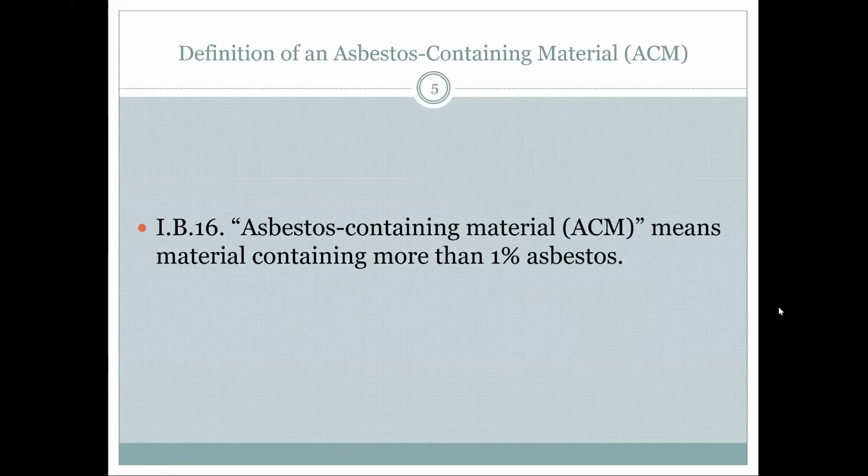All right, the definition of asbestos-containing materials are materials that are greater than 1% asbestos. This is directly out of the reg. It's our definition of when you have to have an inspection.

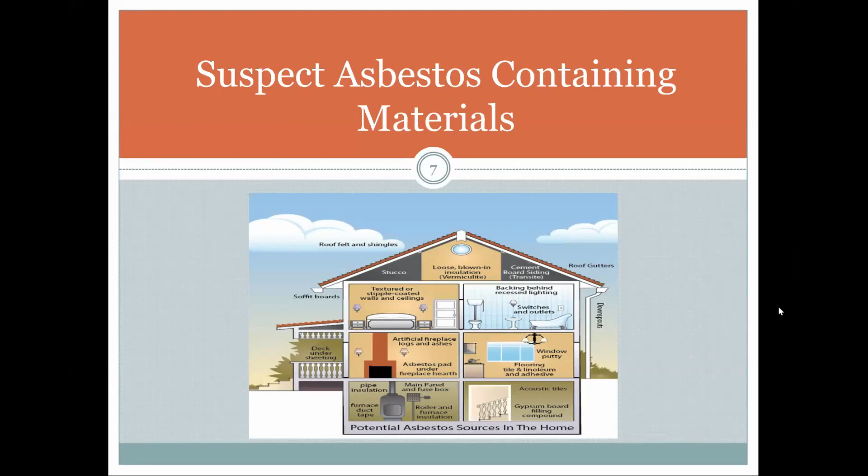So you have, prior to renovation or demolition, disturbing greater than the trigger levels of asbestos-containing materials or suspect asbestos. Some of the suspect-containing materials within residential or commercial buildings can be floor tiles, mastics, roofing felts, roofing mastics. You have TSI, thermal system insulation. I mean, almost everything is suspect asbestos-containing. So just be aware of that.

It doesn't matter really when the building was built. Asbestos has never been fully banned in the United States. The newer the build, probably the less likely you'll have asbestos, but it's still a potential, so be aware of that. Really, there's only a handful of materials that are not suspect materials - that could be metal, wood, glass. However, when you talk about metal and wood, there could be metal products that have asbestos-containing material pressed in between the metal sheets, or pressed wood that also can be comprised of asbestos. So just be fully aware of that. There's so much asbestos out there, it's crazy.

All right, if you do not know if the materials are asbestos, you must assume that they're asbestos-containing, or you have to have an inspection to prove that they're non-detect. We talked about how you have to be greater than 1% asbestos to be called asbestos-containing material. There's another guideline - you also have to exceed the trigger levels of suspect asbestos-containing materials to be regulated by CDPHE.

Those trigger levels are broken down into two different types of structures. We have the single-family residential dwelling, and then we have our public and commercial structure. So on single family, we have 50 linear feet, 32 square feet, or the volume equivalent of a 55-gallon drum. The volume equivalent is usually used for materials that are off substrate that have already been impacted, and you cannot measure them, so pretty small. 32 square feet is a typical sheet of drywall.

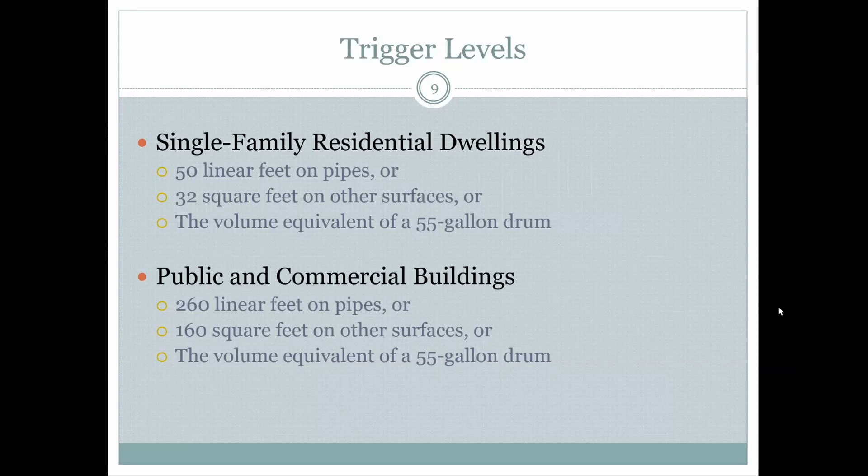So if you're going to be exceeding greater than that in a residential dwelling, then you are required to have an asbestos inspection. Then during renovation or demolition on a public and commercial structure, you have to exceed 260 linear, 160 square, or the volume equivalent of a 55-gallon drum.

All right, this is a really beneficial handout. I would recommend, if you haven't grabbed one of those handouts, to grab it. This is one of our newer handouts. It goes through the flow chart on when you have to have an asbestos inspection. You can reach out to the state, but this one is over there on the table, as well as being posted on our website.

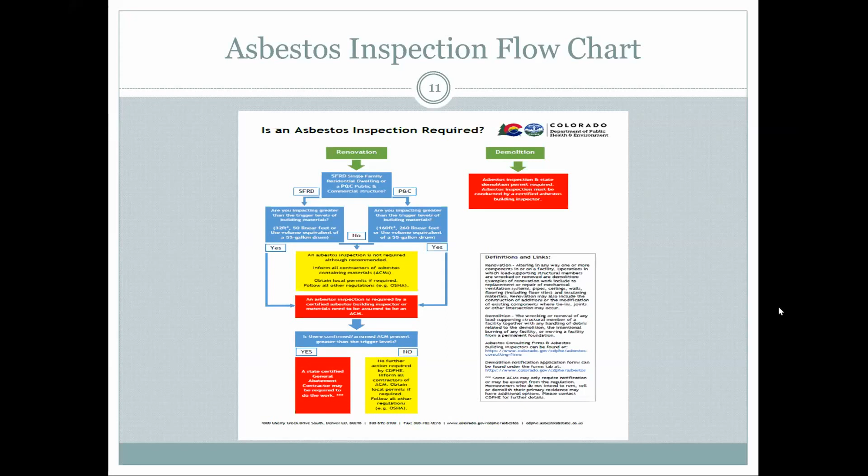All right, so prior to doing remodeling, renovation, or demolition, you want to have an asbestos inspection. We also have a renovation and demolition fact sheet that goes over our trigger levels and has our contact information. It also goes into a little bit more detail if there are exclusions, and you could maybe meet those exclusions. It talks about the trigger levels, and if those will be exceeded.

Buildings of any age, even newer builds, if you guys are tearing out materials, you most likely need to have an asbestos inspection, or you have to have some exempt information from the architect or engineer who. We have this date of October 12th, 1988.

There is no official cutoff date for asbestos, but that is a date that was put into regulation. If the building was built after that date, you could potentially avoid having the asbestos inspection. But just so you all know, I've been at the state for about 8 years now, and I've only seen maybe 2 or 3 individuals who've been able to provide the information necessary to get the exemption from the asbestos inspection. If you are the original builder and your client and your homeowner request that documentation from you, you would be...

...signing a letter stating that to the best of your knowledge, you have not used asbestos-containing materials with the building of the structure. Also, you would want to provide some supplemental documentation. That could be like specs from the information or from the building materials that you have used. You want to keep all that. But we have a form that you all could fill out, or anybody can fill out and send that to us that could potentially exempt you from the inspection requirement.

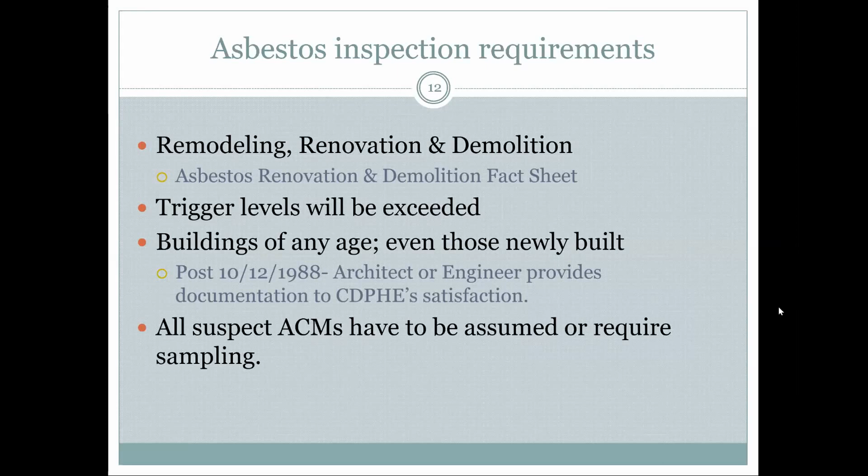Okay, who conducts the asbestos inspection? They're conducted by certified asbestos building inspectors in the state of Colorado. They also are employed by the asbestos consulting firm. So they must work for an asbestos consulting firm that's registered with the state, and they have to be a certified asbestos building inspector. They will conduct the inspection, and then they'll provide the asbestos inspection report.

Again, if all samples are non-detect, then CDPHE does not have any additional requirements. You do have to have that asbestos inspection report on site during all your renovation.

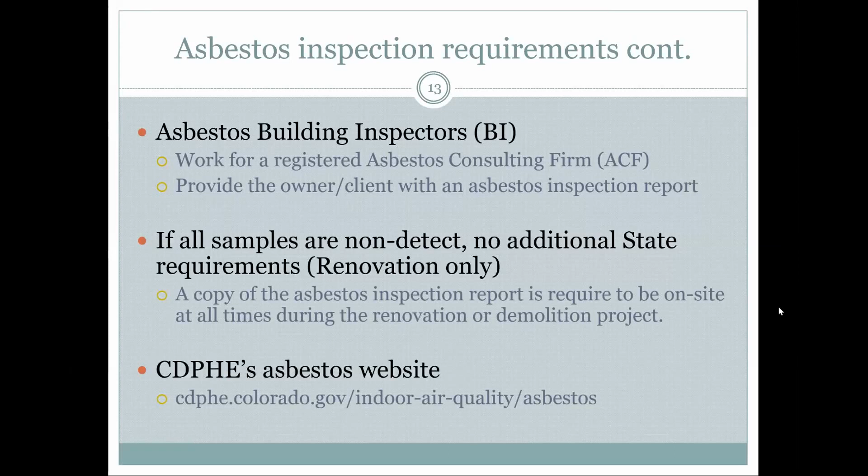Find this information on our website. I'll give you a second if you want to write it down. Otherwise, you can just do a Google search: Colorado Department of Public Health and Environment. Type in the search asbestos. It should bring you to our homepage. It'll give you all of our contact information. You all can reach out whenever you want to.

The inspection reports have to include a couple of pieces of information. It's more than just lab data. Sometimes we get just lab data sent to us, like if a homeowner took their own samples or somebody else took their own samples. We can't disallow individuals from taking their own samples, but those are only used for knowledge, informational purposes. They cannot determine the scope of work. They can't be used for renovation. So you always want to hire that asbestos consulting firm.

It'll include the inspector's name, certification number, a bunch of other things, registration number, their description. Basically, they've been provided what the scope of work is, and they've sampled accordingly. They'll have a physical description of the components to be inspected. They'll include diagrams, locations of the asbestos-containing materials. They'll highlight that information. They'll include assessments of friability, their summary of findings, and the...

So there's a couple of types of inspections. You could have a limited inspection if you're doing like a bathroom remodel. You could have a comprehensive inspection if the structure is going to be a complete scrape and demolished. So limited inspections are isolated to the areas that are going to be impacted during your project. And then comprehensive is top down, inside out, everything that's suspect gets sampled, or it must be assumed.

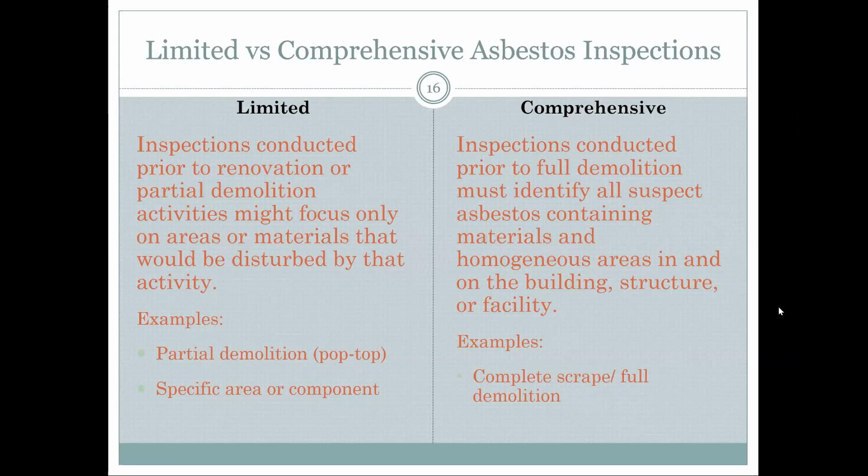Permitting, we're going to go through this pretty quickly. We talked about it a little bit already. We have an asbestos building inspector who works for the asbestos consulting firm. They conduct an inspection and sample accordingly, then provide that inspection report to their client.

If you're not doing demo, you can skip to the following steps at the end. Otherwise, you'll have to hire a general abatement contractor. They're the ones allowed to do asbestos abatement in the state of Colorado. They will submit a permit to the division for review with the payment. Once the application is approved, the general abatement contractor will receive the stamped approved application, and then they conduct the work during those approved dates.

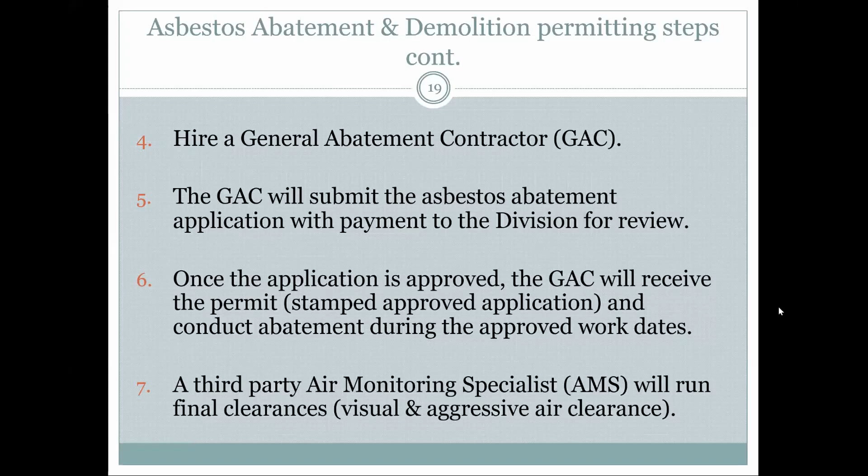If there's a friable asbestos abatement project, then there is a requirement for an air monitoring specialist. They're a third-party consultant who comes in to clear the area so it can be reoccupied.

Demolition notification applications are submitted to the state after that. Again, if you don't have to have a general abatement contractor because you don't have asbestos, you would skip to this step after the inspection. That demolition notification application is submitted to us for review and approval, then issued to the contractor listed on the application. They'll complete the project during the required dates.

I wanted to emphasize the definition of demolition as it's written in Colorado Reg 8 — essentially the removal of load-bearing structural members. So interior renovation that doesn't impact load-bearing structural members would not count as demolition, meaning you would not be required to have a demolition notification. You would just need that asbestos inspection and keep that report on site.

Examples include pop-tops, structural walls, and complete demo. Every single structure coming down has to have its own demolition notification application submitted to the state.

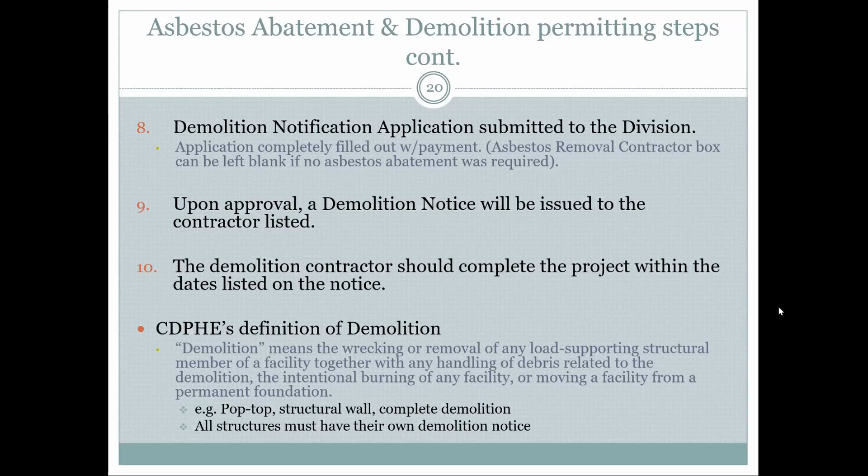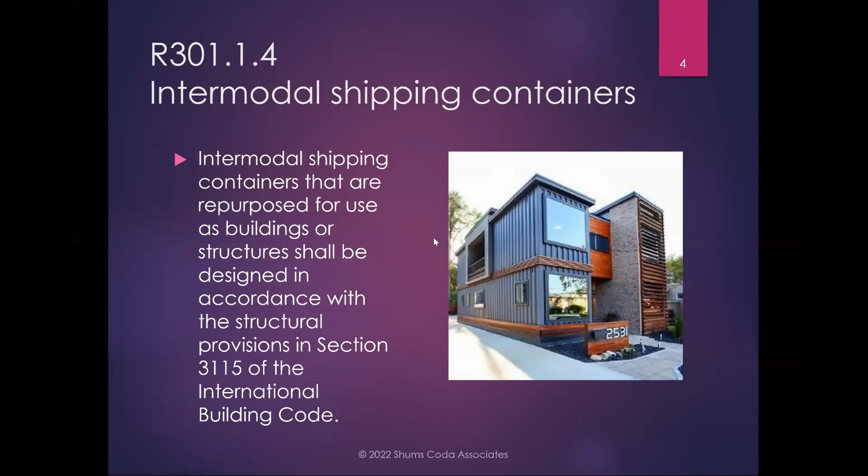First one — I don't know if we'll see this in Cherry Hills. I thought about whether to include it. We now have provisions in both the residential code and the building code for intermodal shipping container buildings. So if you want to build a home out of shipping containers, we now have provisions to do that in the code — it's no longer an alternate design. Most of it is structural, and it should be interesting to see how that works. Some people hate shipping containers, others say that's the way to go. Definitely something we're going to be looking at.

Emergency escape and rescue openings. Just some clarification: of course, we have to have emergency egress windows out of basements, and if you have one or more sleeping rooms, one in each sleeping room, pretty much.

But then it talks about when I get out of that window well, I have to have at least 36 inches of open space, in the yard, to get to the street or the public way. So it's probably not going to be an issue with our setbacks in Cherry Hills, but if you're building in other jurisdictions with tighter setbacks, that could be an issue.

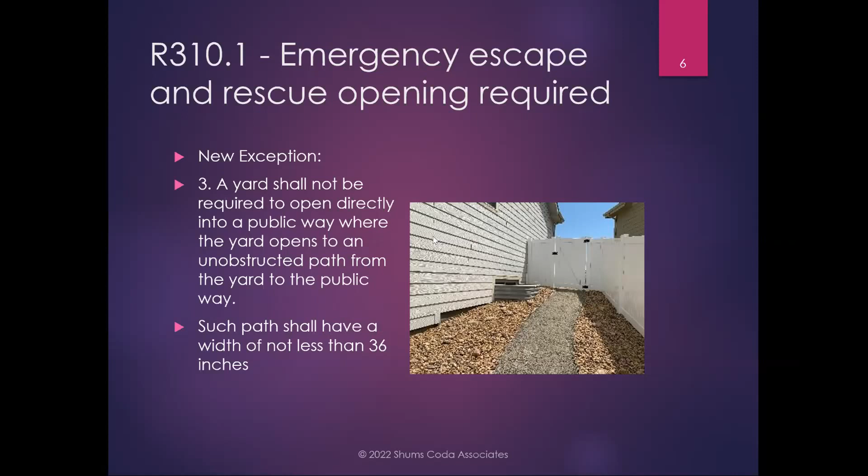And there are some exceptions if you can't get to it, but it still opens up to a yard that gets you there. So if I can't go one way, I can go the other way, and it has to be at least 36 inches. It doesn't have to be a defined path, it just needs to be open so that somebody needing to get out, or the fire department needing to get in, can get to it and get people out of that house.

We have a new provision for alterations, which I think is really good because it really clarifies things. Over the years, I'm sure you remember how difficult it was, how different jurisdictions would look at it: okay, if you're doing a remodeling or an alteration in a house, what do I have to do with the egress window?

So if I create a new sleeping room, I've got to have an egress window. That's right. But it says that other than new sleeping rooms, or existing basements undergoing alterations, you don't have to have an egress window.

So if you take, for example, a basement that's going to be all family room, theater, no sleeping room, you don't have to provide an egress window. Add a sleeping room, now you've got to do something.

And there's an exception that says you can comply with 310.7.1 for that, which basically says we can get an operable window and comply with a couple of requirements. First, existing operable windows have to provide a net clear opening of 4 square feet. Under the requirements of the residential code, egress windows are supposed to provide 5.7 square feet net clear opening. This is saying, okay, if you're replacing one, we're going to let you go down to 4 square feet, as long as you've got at least a 22 by 20 opening.

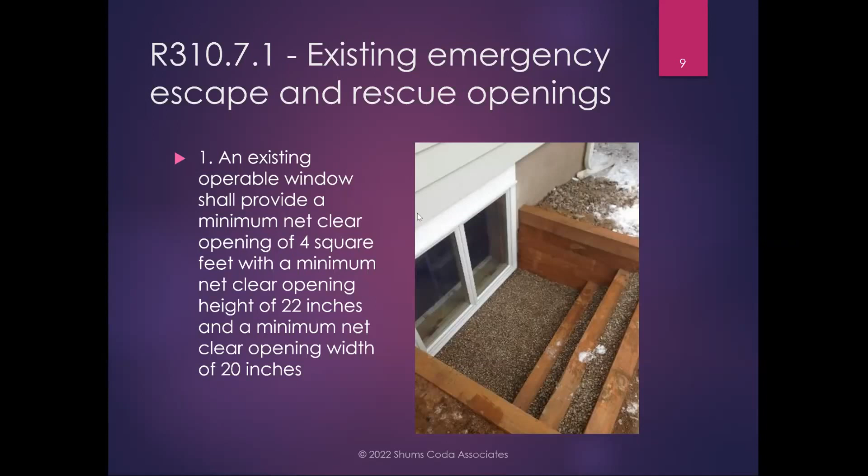So the replacement window is the largest standard size that will fit in the rough opening, and you can use your existing rough opening — it's permitted to be the same operating style. My preference, to be honest with you, would be, hey, let's get it as close as we can. It's got a slider in it, but a casement that makes the opening and gets people out — that's really what we're trying to do, is provide an emergency path out of the building.

So a lot of changes going on with how we look at stairways. Kind of an interesting one — I've dealt with this before we had it. It starts out by saying that, okay, if you provide a stair, it has to comply with 311.7.

Size, run, width, handrails, all those kind of things. Then we added some exceptions, because in the past it was kind of mixed up between the definition of the stairway and within 311. So this was actually trying to clarify what we're trying to do.

First thing is stairways not within or serving a building porch or deck. What we're worried about is stairways in the building, in the house, serving the house, right — off the deck, off the front porch, whatever. What we're not worried about is stairs out in the garden, or in the backyard. The code's not going to cover those.

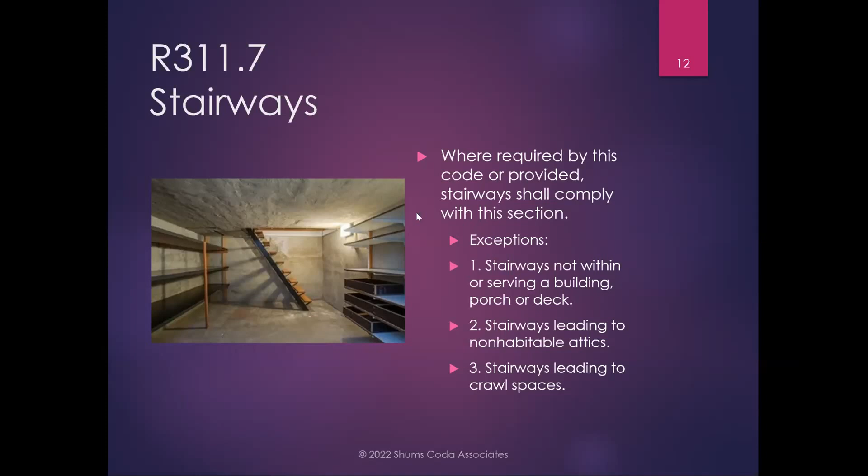So I think a good clarification in the slope of the treads, 1 in 48. We want to make sure that it drains, especially exterior slope. So that was existing language, and then we added an exception that says the landing required elsewhere in the code to drain surface water, the walking surface can be 1 in 20, in the direction of travel.

That's the same thing as what we would talk about a walking surface in the commercial. Don't want to see this, right? Where that landing just kind of drops off. Especially here in Colorado. Can you imagine what would happen when you get to the bottom of those stairs? Down. Okay, relatively flat, but we can go 1 in 20. That's still pretty.

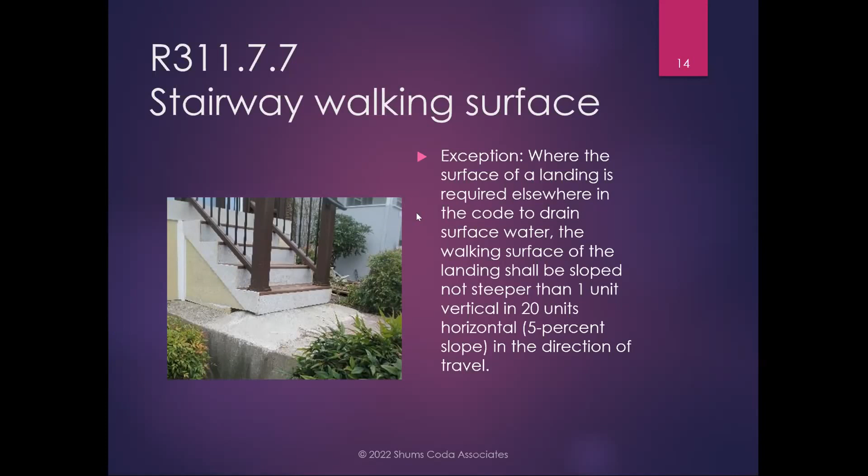All right, smoke alarms. Lots of stuff going on with smoke alarms. Those of you who used to work under, anybody ever heard of the Uniform Building Code? Remember that thing? Well, we're putting stuff back in from the UBC, believe it or not. This was in NFPA 72 and the instructions for smoke alarms, but it's now in the code.

But basically, and this is really going to have an impact on our homes, I believe: I have a hallway, and the room open to the hallway has a ceiling height that exceeds 24 inches from the hallway ceiling height. So I got a coffered ceiling, right? How many times do we have those in our homes? All the time. If that exceeds 24 inches above the hallway ceiling height, we need to put a smoke alarm in that coffered ceiling now. So yep, it's going to look ugly.

We know that, but that's where the smoke's going to go, all up and fill in that space. We want to make sure that that activates and notifies. More than 24 inches, architects, the secret.

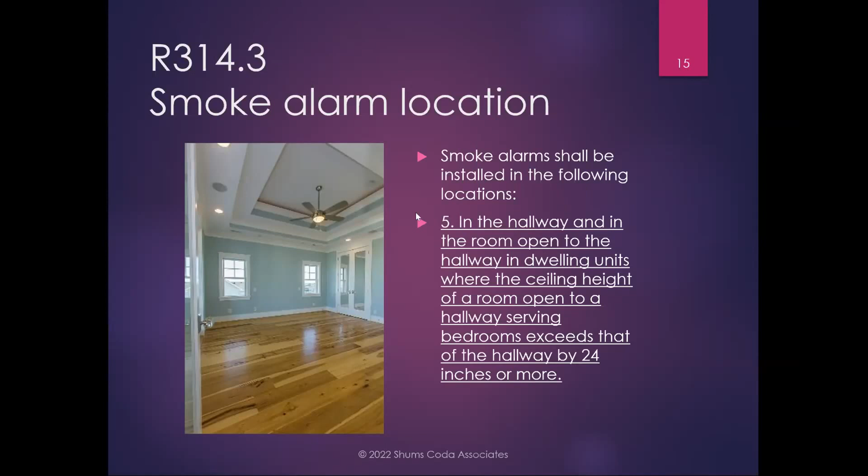So, it was kind of an interesting one that I'd never heard of. Usually not a problem in our homes, but there's requirements for location of smoke alarms in relationship to cooking appliances. 20 feet, 10 feet, something like that. Then we got a new exception that says if you have a smoke alarm that is listed and marked to help reduce cooking nuisance alarms, you can be within 6 feet of the cooking.

Never heard of this type of smoke alarm before. I went, oh, that's kind of cool. So I did a little searching, of course, you know, you always search all-knowing Google, right? Trying to not activate on cooking smoke.

Real quick, let me go back. What's going on with smoke alarms? There's some new changes coming up that were discussed about the sounding of the alarm, going to a lower hertz, so 520 hertz alarms, because we find that people don't wake up sometimes, despite how obnoxious they are.

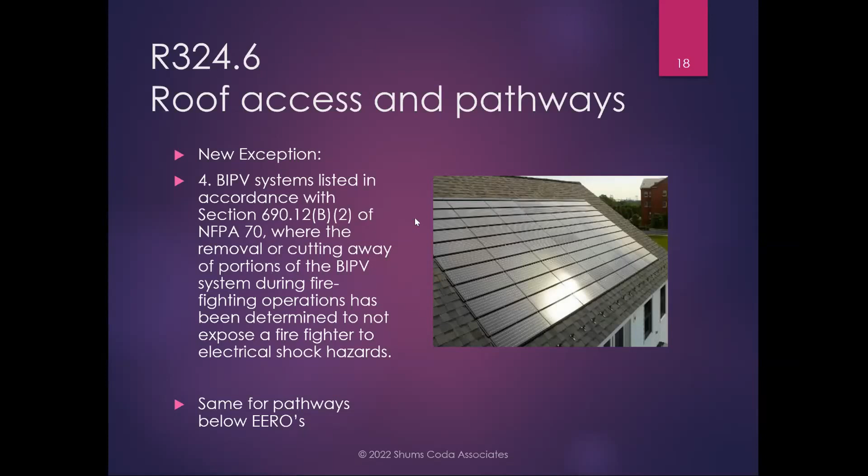Same thing with egress windows. By the way, if you have a question as I'm going through, just yell at me and we'll see what I can do. All right, habitable attics.

Big discussion, and we have habitable attics. We all know that the IRC is limited to 3 stories in height. But there were provisions that said you can do a habitable attic at another level, so it looks like 4 stories, but it's not a 4-story building, it's only a 3-story attic. Well, the language that we had was really bad, and people were taking advantage. Fire service is going, wait a minute, time out, never looked at these homes to be 4 levels in height, from the standpoint of rescue and firefighting capabilities, all those kind of things.

So we did a whole big revision to the habitable attic thing. First of all, it has to meet the requirements of 304, which is 70 square feet minimum floor area, ceiling height in accordance with 305. Then with beams and all that kind of stuff, habitable attic shall be considered a story above grade plane. Before it said we're not a story, now we're going to say well, it's a story, except it gives us the exceptions taken.

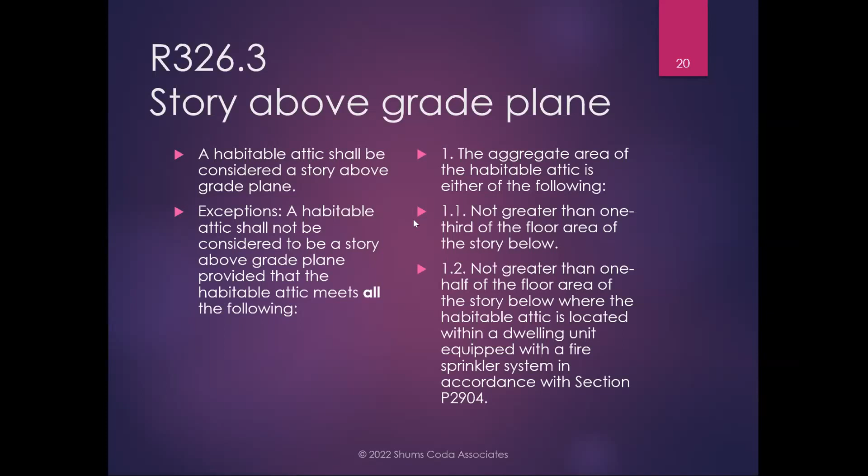It says the occupied space has to be enclosed by a roof assembly above, 3 walls, knee walls, floor ceiling assembly below. Floor of the habitable attic can't extend past exterior walls of the building. I'm going to leave this out - it has to be like an attic. And if it's located above the 3rd story, the dwelling has to be sprinklered.

Now what that does to the height limitations in the zoning code is a different story, because we're still going to have to comply with the height requirements as well. So just something to keep in mind.

Questions on habitable attics? Definitely an option. Habitable attics have to have a means of egress in accordance with R311, so regular stairs, spiral stairs.

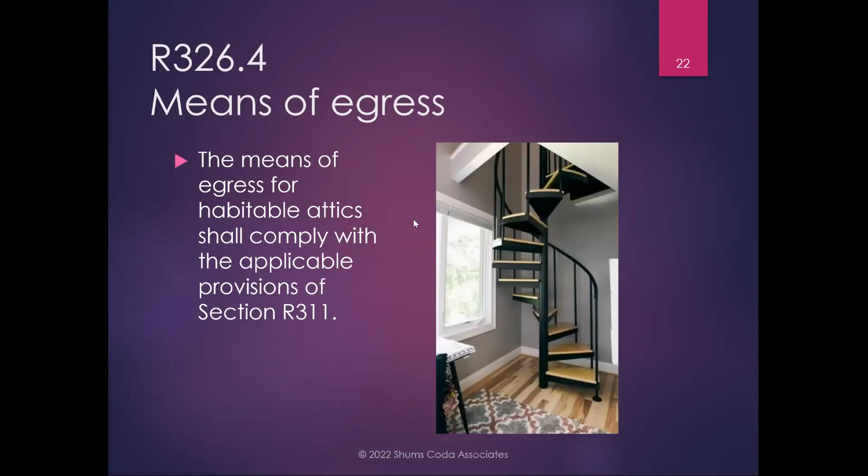All right, I see this as a big thing coming into Cherry Hills - energy storage system. Whole bunch of new language, and I'm not going to go into the details of everything, I'm just going to let you know it's there, about having stationary storage battery systems. So if you got a PV system and you want to actually use it for power in the home, we now have a provision for that storage system for you. The NEC and all those kind of things have to be listed. Talks about protection of the system so that we are safe.

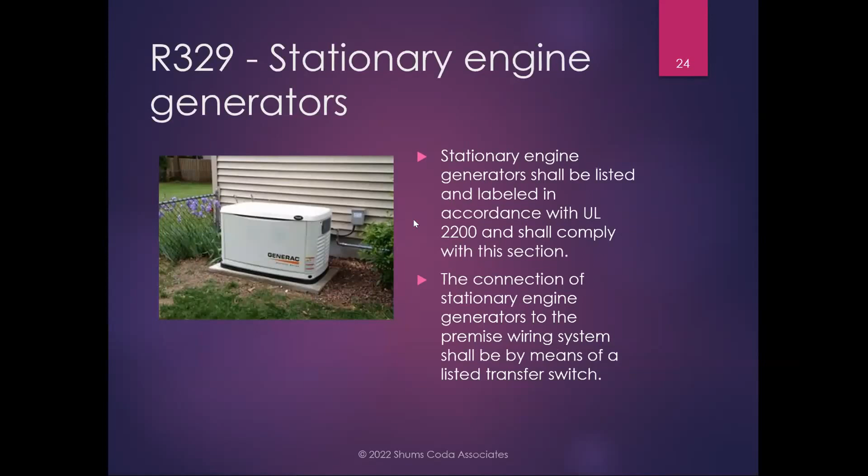New language for stationary engine generators - got a lot of generators going into this city, and so this is going to be really helpful to make sure. It basically just says they have to be listed and installed, of course, per the NEC. We have stationary fuel cell power systems, same kind of thing - it's got to comply with 1206 of the fire code as well. It's been a big move in codes for all of these new energy systems. So some good.

Vapor retarder - yeah, what I call a yo-yo requirement. That's when something goes into the code and then back out of the code. I hate it because it makes us look like doofuses. So the 6 mil vapor retarder underneath the concrete slab going to 10 mil.

Last week I was at the IRC hearings and there was a proposal - I can't remember what happened with it - that puts it back to 6 mil, or some kind of classification.

We had a great discussion with a gentleman named Joe Lstiburek with the Building Science Corporation, great building science about this whole subject. He said it really doesn't matter - the big issue is how puncture proof the plastic is. It's more about keeping moisture from getting up into the concrete.

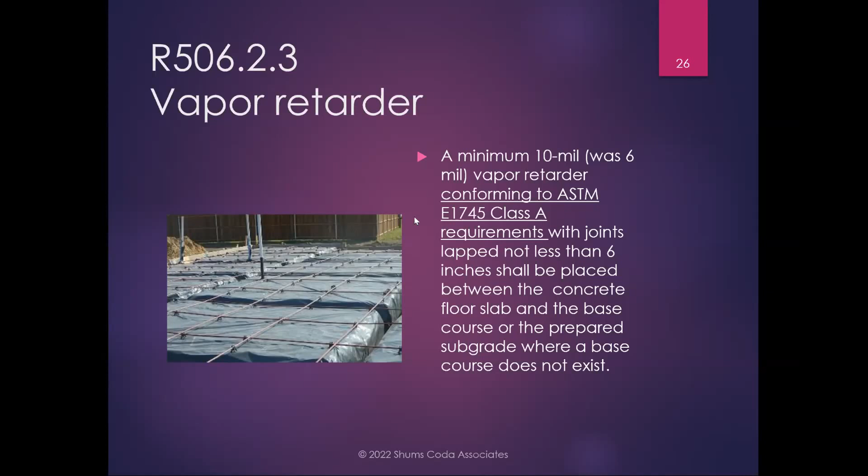All right, lots of stuff happening with decks. Over the last couple of cycles, you've added a lot of language - actually added a whole section on decks. It's great because we can just look at that section. It covers the materials we see in decks.

The change was that the design has to be based on either the live load being 40 pounds per square foot, or the ground snow load indicated in R301.2, whichever is greater. Our snow load's 30, so we'll go back to 40. But if you're building in the mountains where you've got a 100-pound snow load...

With the higher footings, a couple exceptions were added. We don't have to have footings for freestanding decks that bear right on precast concrete pier blocks. How long have those been around? Those have never been permitted by the code. I have a saying: if we took all the illegal stuff out of Home Depot and Lowe's, they'd be half the size that they are.

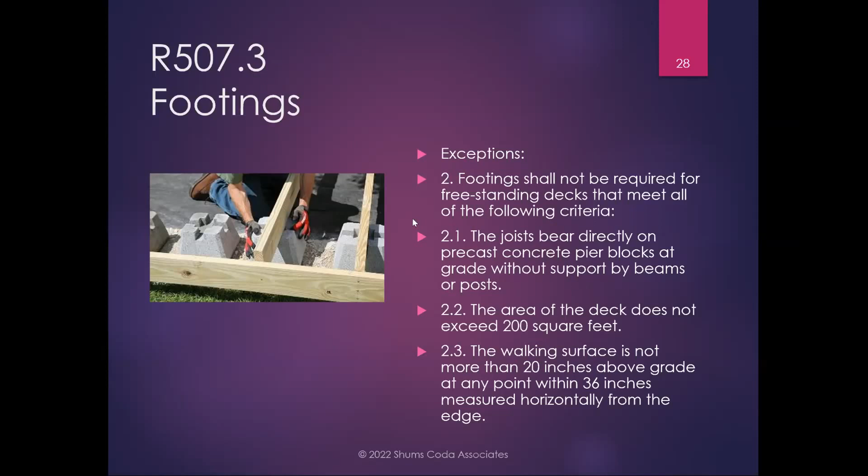So if you want to do one of those little decks out in the middle of the yard, you can use those precast piers. Deck footings have to be at least 12 inches below the undisturbed ground surface if you're going to do that kind of block. If it's attached to the house, remember it's got to meet frost protection - the attached frost-protected structure has to extend below that, or be erected on solid rock or some other approved method.

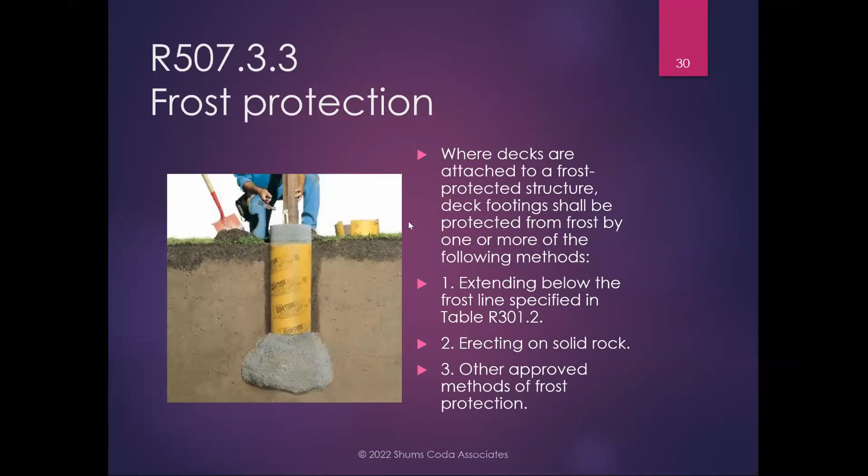Deck posts - we have a new table. That's probably the biggest thing, a prescriptive design for decks. It gives you deck sizes, span, deck post heights, beam spans for 40 pounds with different kinds of materials, including redwood.

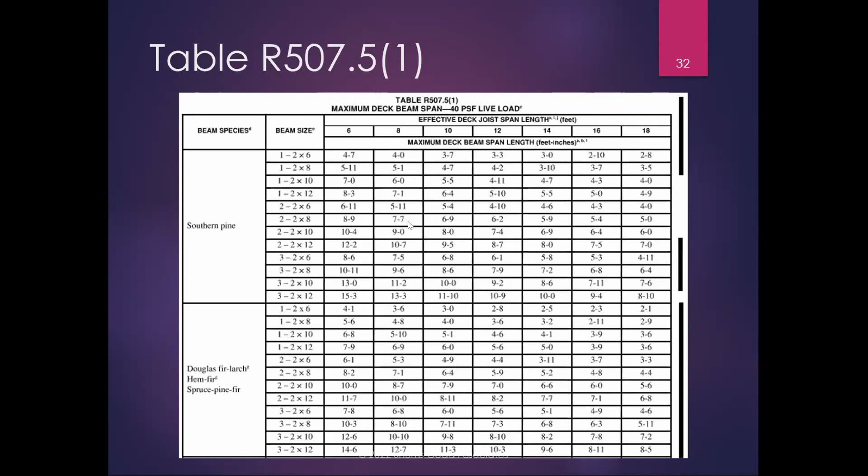Redwood framing, treated lumber, SPF - follow these tables and you don't have to do any engineering. That's the whole idea of the IRC, it's a prescriptive code. You can build it under this code, you don't have to get it engineered. Most of our homes are large enough that they're engineered, but if you came to us and said you want to build a deck using this table, perfect.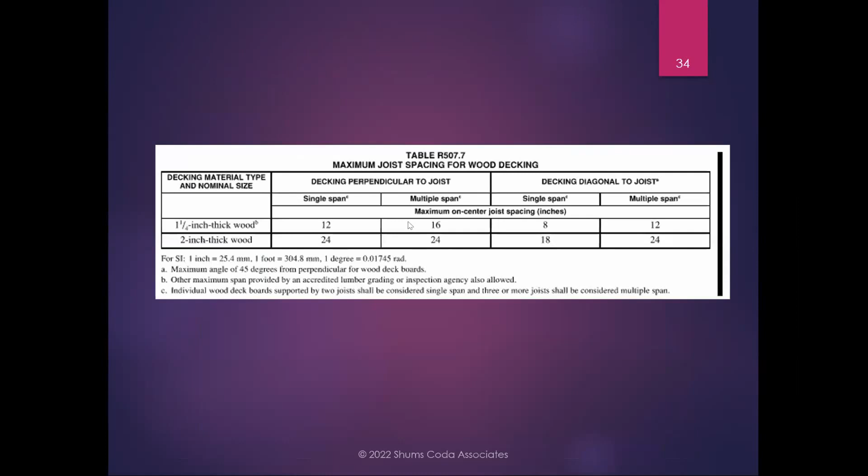Joist spans, same kind of thing - joist spacing for wood decking, using 1.25 or 2 inch thick wood decking materials, gives you the maximum spans for all of that.

Deck ledger connection - a lot of discussion on how we put that ledger on the side of the house, what size lag screws or lag bolts we're going to use, and the fastening, all based on the live load.

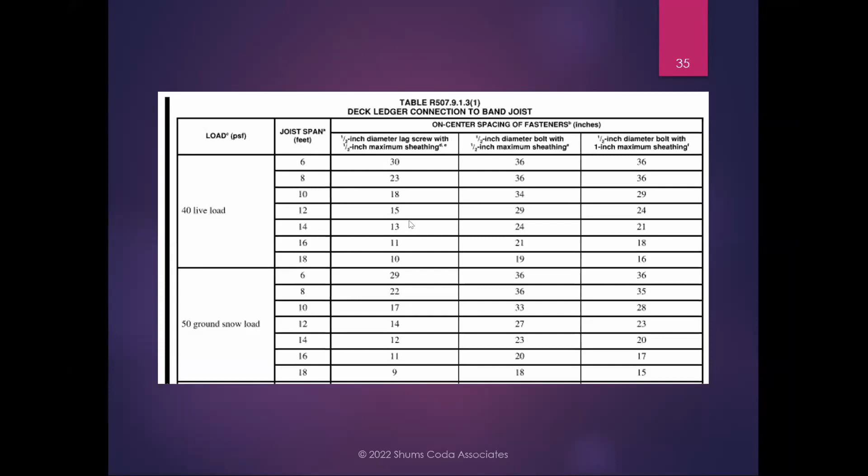12 years ago, we had nothing - no guidance on how many lag bolts you need. We just did what we thought was right. Now we've gotten some engineering done, and speaking of that - guardrails.

Guard loads have to be transferred to the deck. There's a lot of discussion going on about how we connect that.

Prescriptive designs were put in, but it wasn't approved, so it's just some generic terms to do that. Guards are connected to the deck joists or beams, and have to be connected to the adjacent joist to prevent rotation of the joist or beam. Relying on fasteners in end grain alone is not permitted.

So, closure—I build a deck. I'm an old framer, so I did the end nailing of the rim onto the joist and post, 4 feet, the whole bit. Of course, initial inspection, it passed, right? Because how do we test the 200-pound load guard? We lean on it or shake it.

The inspector goes over and shakes the guard. That's what they're doing—they're checking that 200. So it worked fine. Years later, I go out on the deck, I lean on the guard, and guess what? It moved. Shrinkage, right? I had to go back in and attach everything.

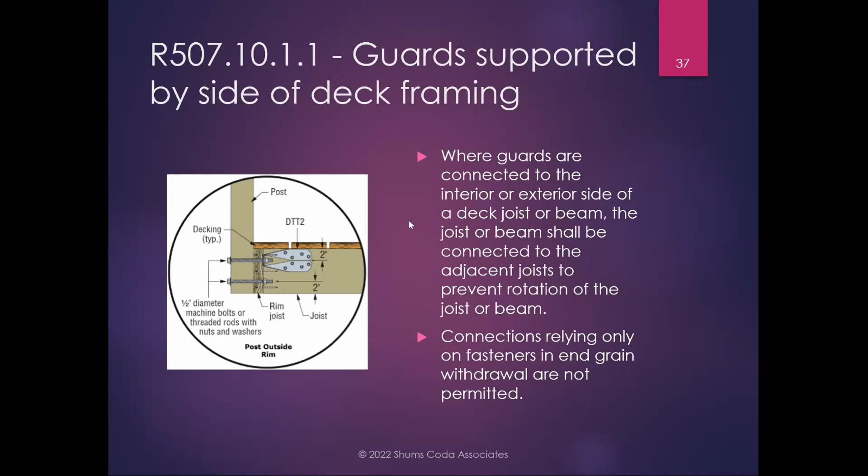They'll bring engineers in to do design. Be careful about how you're connecting those guards to the deck. If they're attached on top of the guard, they have to be connected to the deck framing or blocking and installed in accordance with the manufacturer's instructions. You know who that manufacturer is, don't you? Old Simpson, right? Or USP—I'll use USP. But anyway, that's what we're talking about.

Where 4x4 wood posts support guards, you can't notch them. It's all the time, right? Not as much as we used to, but if you take that 4x4 and notch it, now it's just a 2x4.

What I need is a volunteer, because I'm going to take a 2x4 and 2 lag bolts and put it into this table and let it extend out 36 inches. I need somebody that weighs at least 200 pounds to stand out here. Break.

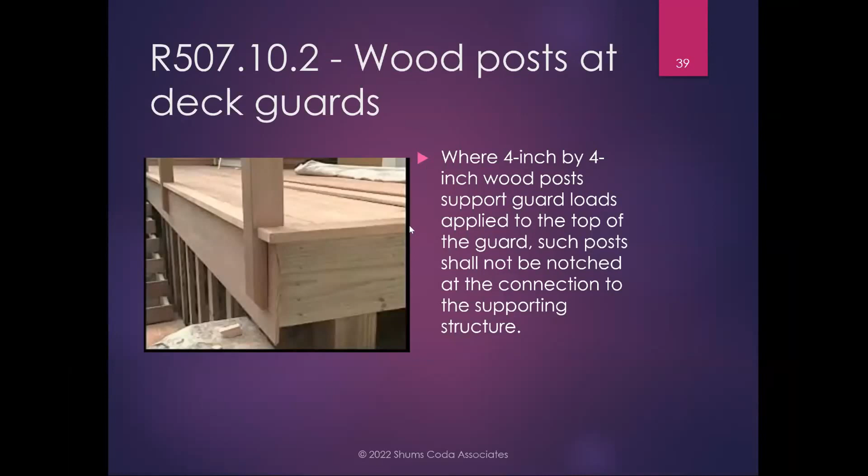That's why the code now says, hey, plastic composite guards are illegal in Cherry Hills. No, I'm just kidding. They're not illegal—if you want to use them, you can.

But they have to comply with 507.10.3, which says install per the manufacturer's instructions. Other guards, same thing, need to comply with manufacturer's instructions. All kinds of stuff. There is some discussion going on about cable guards.

Everybody loves to use cable guards. My opinion is they're fine. The discussion is, what about how much pressure do I need to test against with the 4-inch sphere? There was a lot of discussion last week about that. I've almost come to the opinion that it's no pressure.

In fact, there was a code change. But my recommendation is that you follow manufacturer's instructions, which says put them at about 3 inches on center, depending on the cable thickness. Whatever system you're using, just from a standpoint of liability more than anything else, I want to look at those.

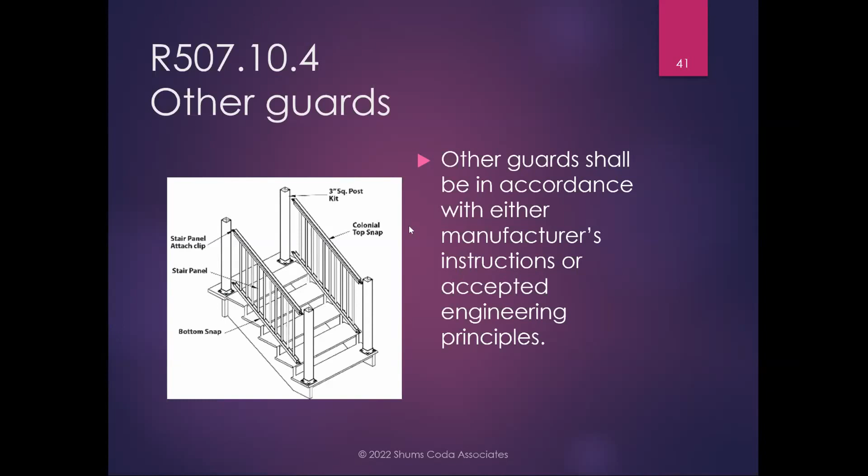See what happens with that one. I know you were going to get an update on this. All right, this is going to be a fun one—you're all going to love this one.

Garage doors now have to have labels on them. Make sure you start talking to your garage door suppliers and say, hey, we know this is coming. What is this? The manufacturer has to have a label on the door identifying the manufacturer, the door model, series number, the positive and negative design pressures, the installation instruction drawings, reference number, and the applicable test.

So why? Microbursts, high winds, tornadoes. Think about even when we had the tornado up in Windsor—we found that a lot of those homes we lost started with losing the garage door. The wind knocks out the garage door, picks up the garage, grabs it, tosses it, and brings down the house.

Or we just lost the garage. Things happen. Number one, the garage door wasn't designed to handle the wind. Number two, the portal frames on each side of the openings weren't right—a lot of the damage we saw up in Windsor. So make sure you talk to your suppliers and go, hey, this is coming. Make sure that.

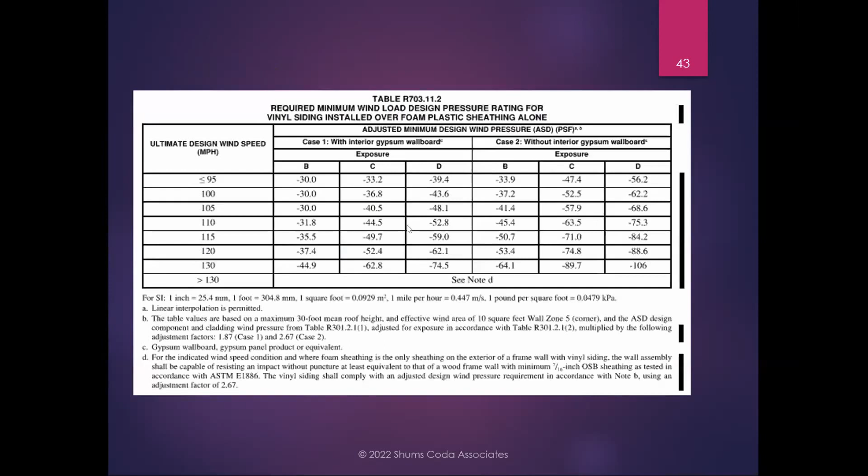Minimum wind load design for vinyl siding - for those of you doing vinyl siding, some new wind requirements. Then we have a whole new section on soffits.

Last week we had a code change in the definition of a soffit. Many of you know what a soffit is. I actually testified - what was the one I testified on? Oh, there's a code change to define landing. Landing is, right?

Anyway, so now we have all kinds of information about the installation of soffits, whether it's vinyl, wood sheathing, metal, cementitious panels, all those kinds of things. It talks about wind pressures, and it's all wind-based, so that we don't lose that soffit. Whole new section.

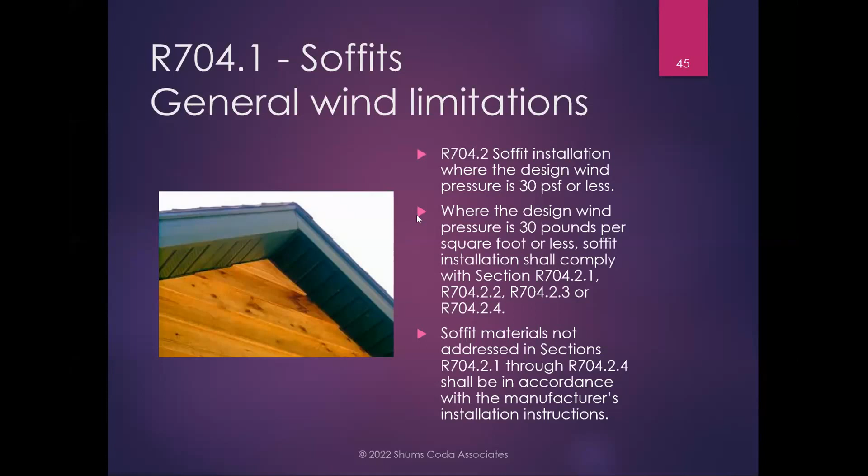So you've got general wind limitations, wind pressures at 30 pounds. Then BIPVs, a new exception that Class A, B, or C BIPV products have to be installed if we're within 3 feet of the lot line, or you're in a wildfire area. Probably we will not look at that here in Cherry Hills - I don't see the fire risk.

Concrete and clay tile - we do a little bit of that here. It used to say you got to do that over solid sheathing. We have a new exception - it says you can do it over space sheathing in seismic design category A, B, and C, and we are category B. So if the manufacturer has installation instructions on space sheathing, that's fine, but remember you've got to make sure you follow manufacturer's instructions.

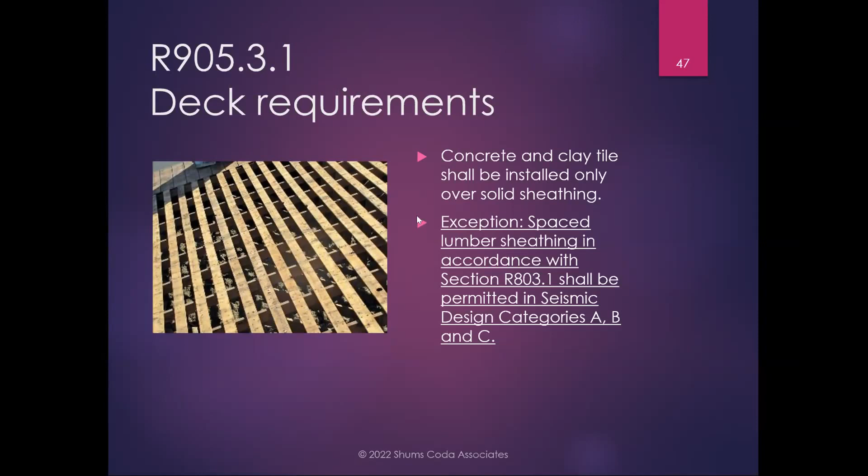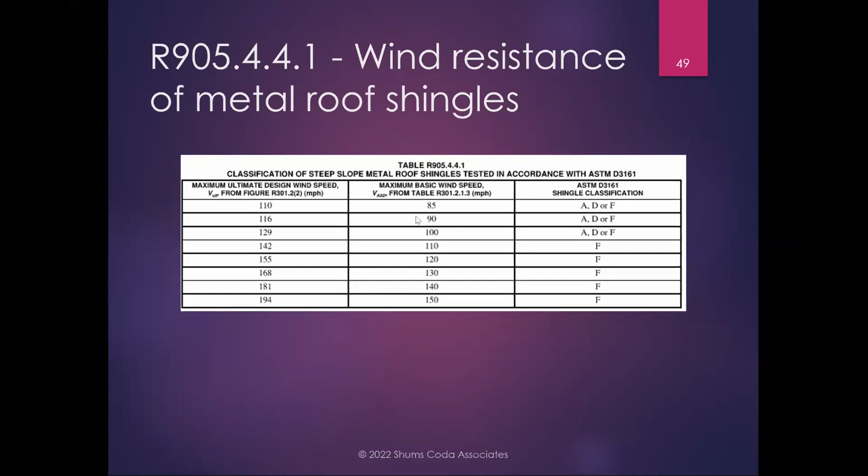All right, does that work? Okay, questions on what I covered? Chris, you okay? Or any questions about the building department - how we can do things better?

Oh, sorry, we've got to get the microphone too. Would that require changes on...?

Oh, no, we're not going to talk about electrical. Sorry. So, the problem with electrical is that the electrical portion of the residential code is written by NFPA based on NEC. Now the state says we have to use the 2020. Any specific questions on that?

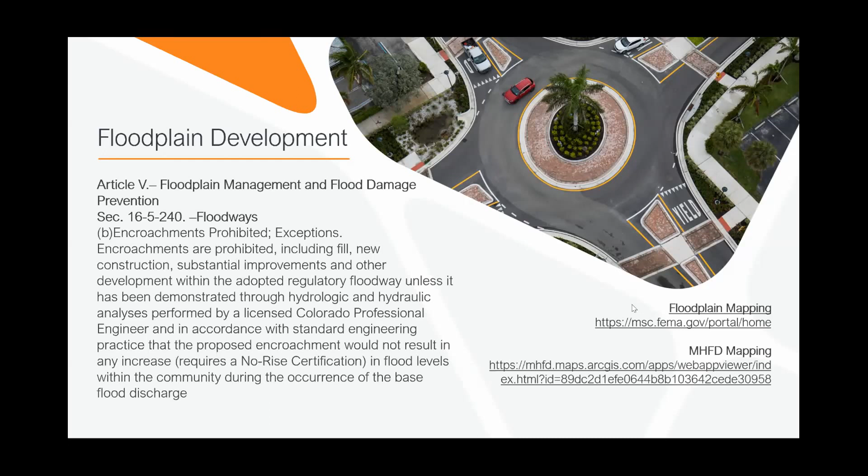This is from Arapahoe County, where a setback shall be provided between the 100-year floodplain and structures. So the floodplain may be over here, your house is outside the floodplain - just make sure of that separation within the environment.

Because Cherry Hills Village has more development code than other jurisdictions, developing in the blue line you will still have to size it appropriately, which probably means following Mile High Flood District standards, which obviously do not allow any residential structures within floodways. That's a no.

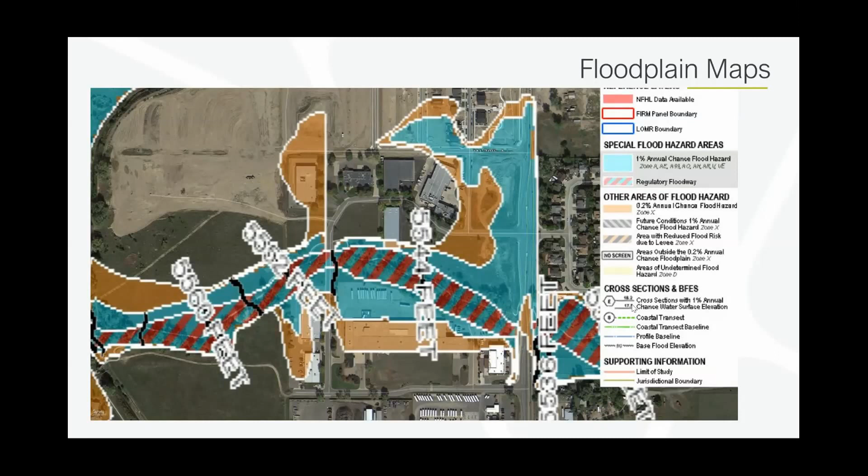So I mentioned this earlier, the process is basically a variance. If you want to go pursue that, then that's going to take bringing in an engineer to meet the technical criteria.

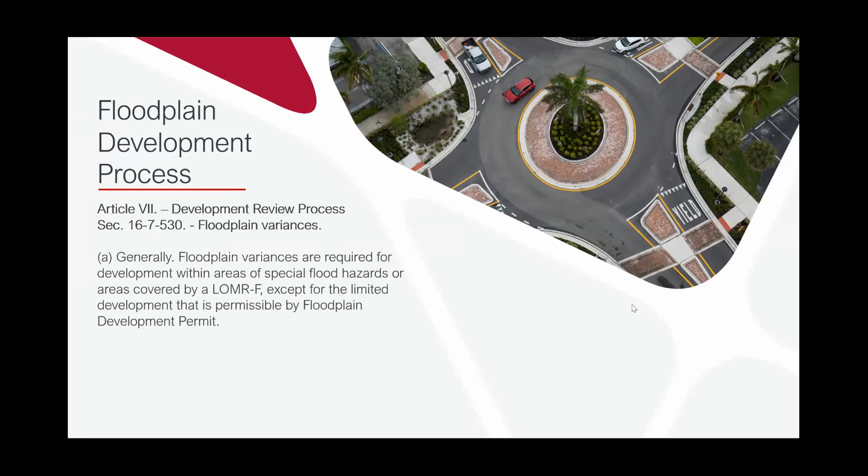When we get the most questions on, if I have to do stormwater, we'll talk through some criteria with triggers that will trigger quality and how to be compliant with village requirements. There are two primary ways water quality is required.

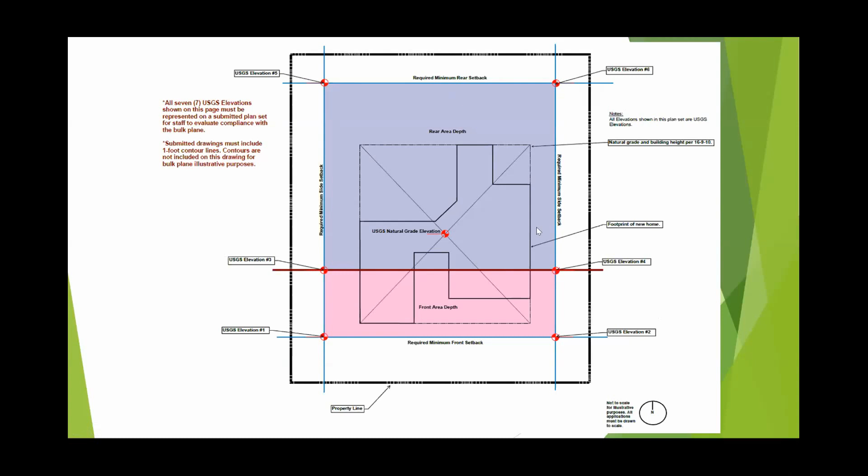Saying that, we get into our 2D bulk plane elevation drawings. This is where we see the USGS points relative to the site plan. Please make sure that these points do match your site plan. Sometimes we see them a little mixed up, but you'll use the points.

You're going to see the pink area, once again, is your front area representative bulk plane, and the blue area is your rear bulk plane. So you're going to use the USGS elevation point that corresponds, in this case the left or right, or the east or west side.

For the front area, you'll go 21 feet up and then a 40-degree angle over to that calculated maximum height. Depending on the zone district, it's going to be 30 feet or 35 feet. We do want that represented on the bulk plane elevation drawing, as you can see.

For the rear area, we want 12.5 feet up, then a 40-degree angle over to that same maximum height. The reason for the 21 versus the 12.5 is that the structure's massing should be the majority in that front area depth.

Going to your side setback elevation views, you'll notice that the front area is a flat plane. When you're dealing with less than 7% grade change, you're going to use the USGS point where the front area meets the rear area at that front setback. And then you hit the rear where you're using that back rear, depending on the side, east or west, left or right, 12.5 feet up over 40 degrees to your maximum height.

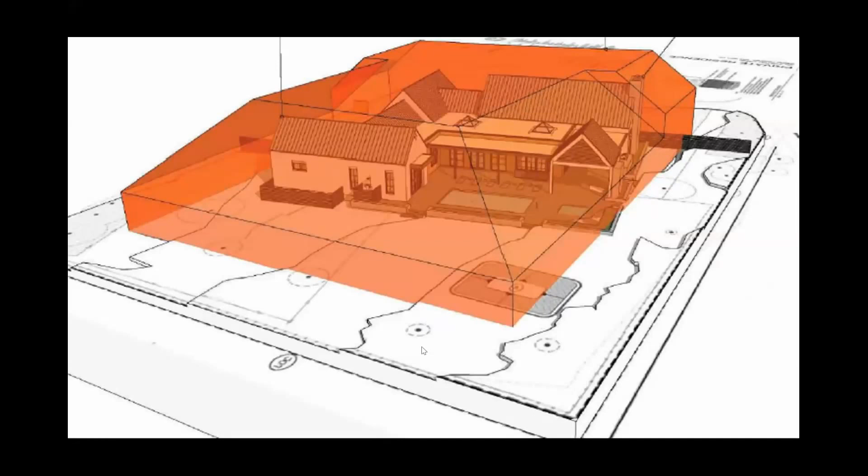And then this is just a rear area view of the bulk plane, same property. With that, I'd like to open up for questions, and don't feel like you have to ask questions just on bulk plane. This is regarding zoning updates, permitting process, anything for our community development department.

No, the 3D image is not in the bulk plane handout, but you make a good point. That's something we can certainly do. No, that's great, and we'll definitely take that into consideration, and that's a great point. Thank you for that.

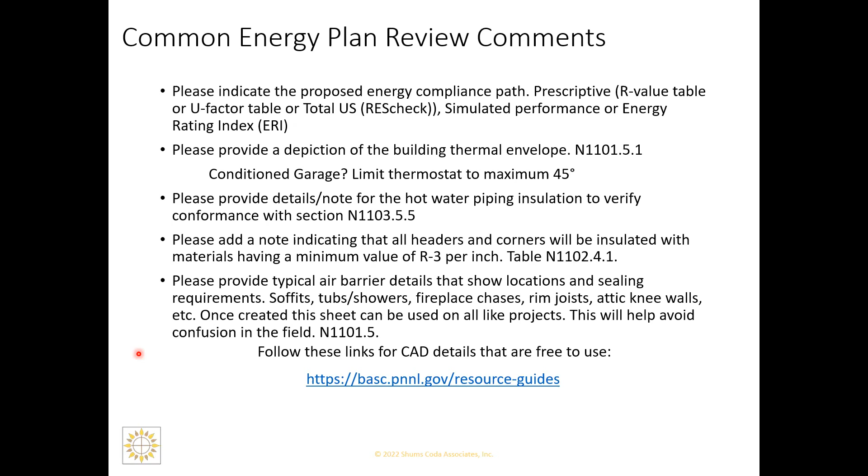Okay, yeah, just interrupt me if somebody raises their hand or has got a question.

Then just a quick note on the electrical plans, or if you want to create just an energy sheet, that's perfectly fine too, and have all these notes on an energy sheet, that works for me. Just 90% of the lamps are going to have high efficacy lamps. Get a lot of unvented attics here. Probably the biggest thing is that there's several different ways to do that.

Okay, and I keep referencing this R806.5. The key is that we've got to have at least an R20 of air impermeable insulation, so foam, and it needs to be a class 2 vapor retarder. The closed cell is generally class 2, but we just need to make the statement on the plan. So when we get halfway through spraying this foam and then realize it doesn't meet the code, that's tough.

We don't want to go down that road at all. Next thing here is just talking about what type of insulation are we using. So this kind of gets back to, don't tell me what the options are, tell me what you're doing in your house. How is it you want this house built? You're the designer, you tell the builder, you tell us. And they just got to match.

I don't know how many times it seems like you've done an HVAC design and you've changed the house, but we didn't go back to tell the designer that we changed, and a lot of times things don't match. And believe it or not, that's all I'm looking for. I mean, there's other things, but that's probably one of the bigger pieces. We just need to see apples to apples.

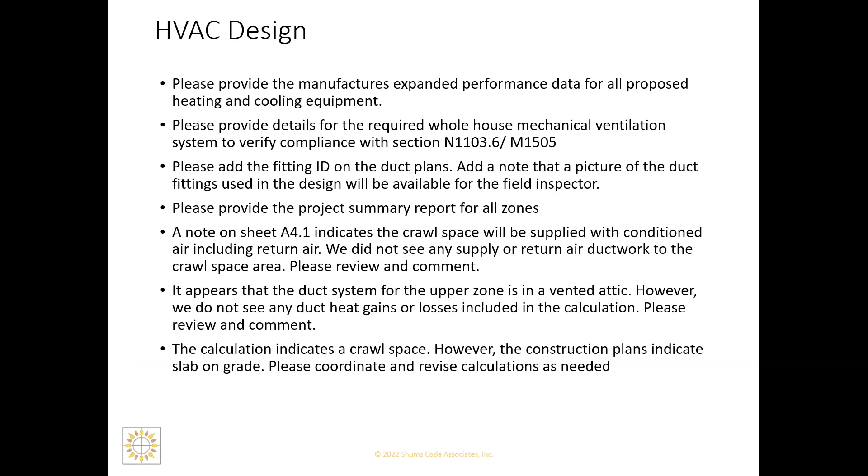People find out how good they've done. Oh yeah, crawl space, yeah. I don't see this very often, but it's like, okay, well the plans are, right, calculations showing that we've got crawl spaces, but the plans are slab on grade. Clearly something happened somewhere, the designer didn't get a chance to redo it.

Big deal. And I take them right to the manual J, to where it says these are mandatory requirements when doing a manual J, which is the heat gain and heat loss calculation. So you're going to have windows maybe that have coverings, and hey, if it doesn't, that's okay too. But what I get is that all the windows in the house don't have any covering in any way, shape, or form, which I think is unrealistic.

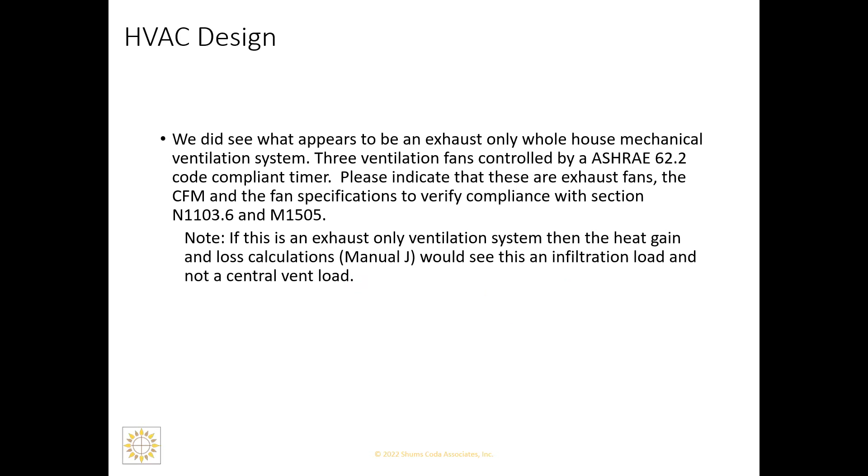The calculated sensible heat ratio will always be 1, because we have no calculated latent load. So am I looking for something particular? No, I'm looking for whatever it is that you've picked for equipment. You're never going to find equipment, an air conditioning appliance, that's going to have a sensible heat ratio of 1. It's not going to happen.

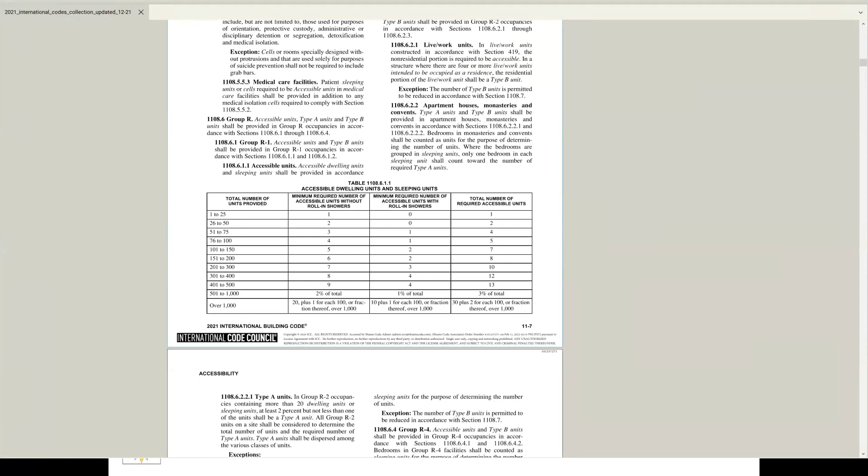Okay, how about that? You should be able to see that now, huh? Okay, so here is the new table. You can see it, yes? Yes, we can see it. Yeah, it's on the screen. Yeah, so here's our climate zone stuff.

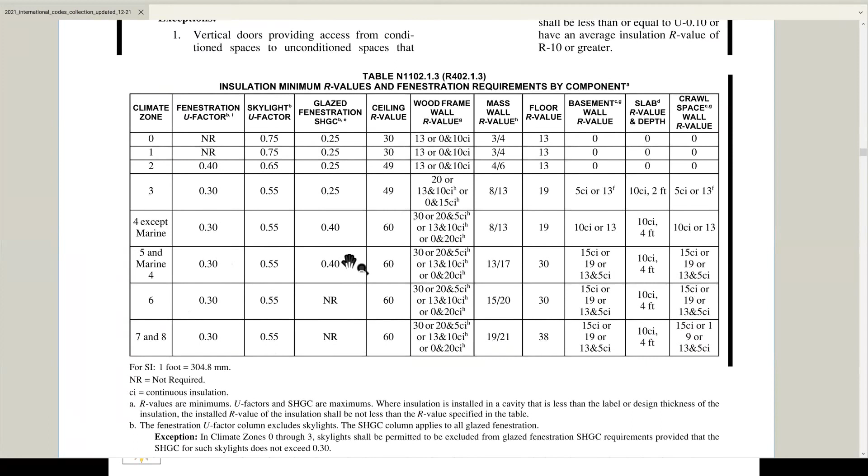So you've got 0.3 for your fenestrations, not a change there. We do have a solar heat gain coefficient now, so I don't know that I'd worry so much about that. All the windows meet that simple.

R60 in the ceiling. The thing you'll have to worry about there is if you use blown-in cellulose in your attic, you're going to have to go to 5/8 sheetrock. If you use blown-in fiberglass, you should be okay. It only takes so many pounds per square foot. That's one bad thing there.

And then here's your choices. You've got R30 cavity, or 20 plus 5, 13 plus 10, or 0 plus 20, meaning continuous insulation on the outside. Floor stayed at 30. This varied a little bit, 13 and 17 for your mass wall. Not a lot of guys are doing mass wall.

You've got 15 continuous, R19, or 13 plus 5 on our basement walls. So they've got a little bit of variation there now for that. Slab depth... yeah, 10, that doesn't seem right. Oh, crawl space, that's the one I was thinking of there. I thought that went to 15.

This is the third, now this is the PDF. I might have to go -- I think this might be 15 now. I don't think this table is correct. This is not a real recent PDF, but it gives you a good shot of what's happening. Okay.

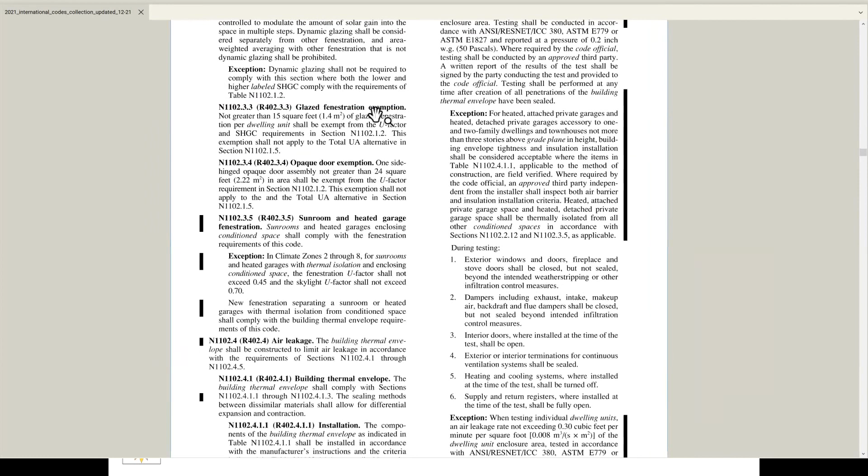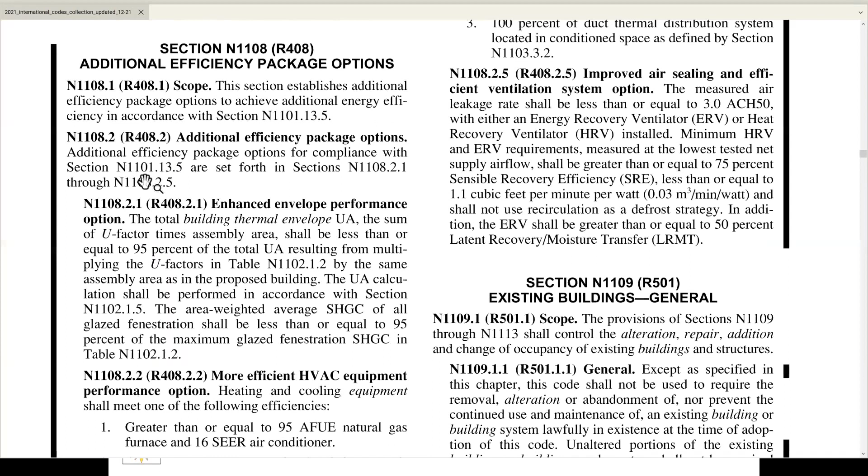The other thing that's big is additional efficiency options, like we had in air barriers, are the same. Let's see if I can get there quicker. Oh, there we go. So you have choices here.

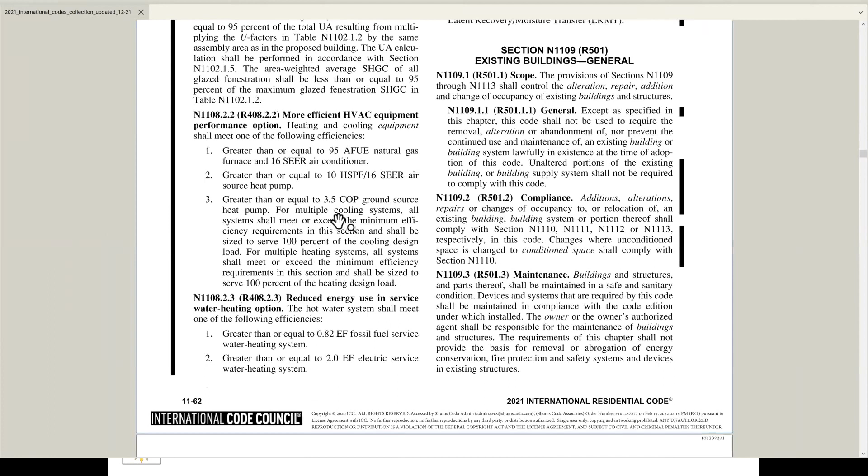So like in the commercial code, residentially, we've got to do one of these, okay? So you've got this enhanced envelope piece, more efficient. So to the earlier question about efficiencies, here's this option piece. We can't mandate it, but we can say it's an option. You've got a reduced energy option here for your water heating, service water heating option.

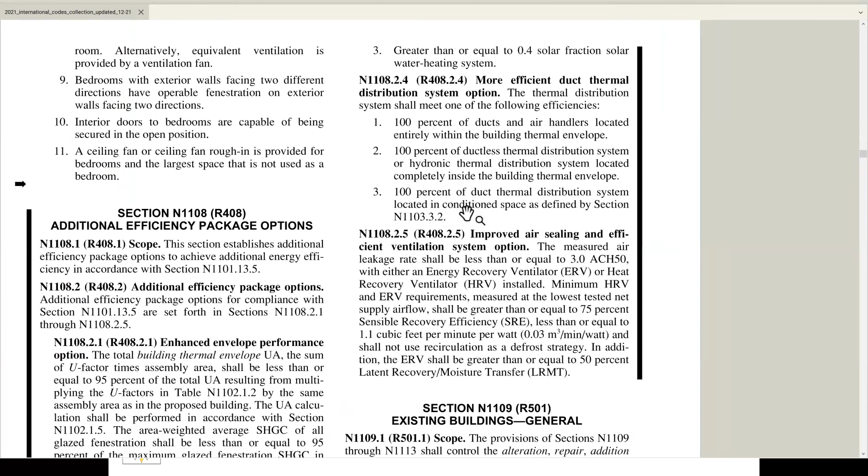You've got this one here, which for some of you will be the one to use. It just talks about more efficient duct thermal distribution, and says 100% of the ducts and air handlers located within the thermal envelope. So for those of you that do have unvented attic assemblies and conditioned crawl spaces, this would work. Then this is hydronic and ductless type systems for those of you doing maybe hot water heat. If it's all inside, you're good to go.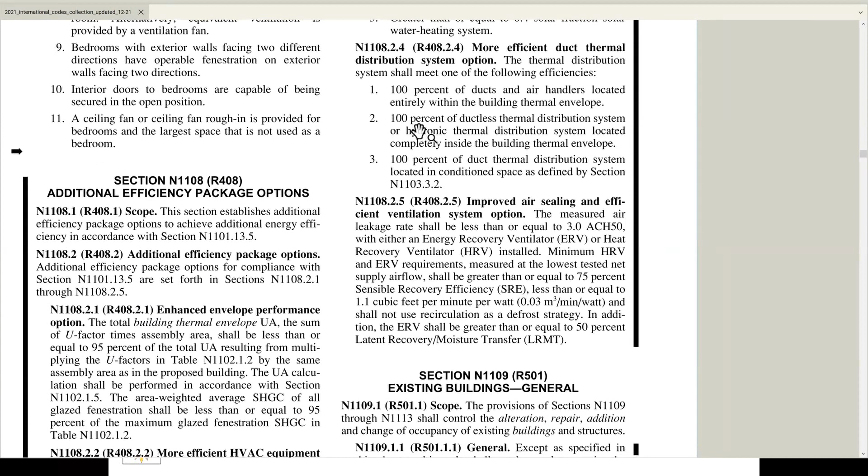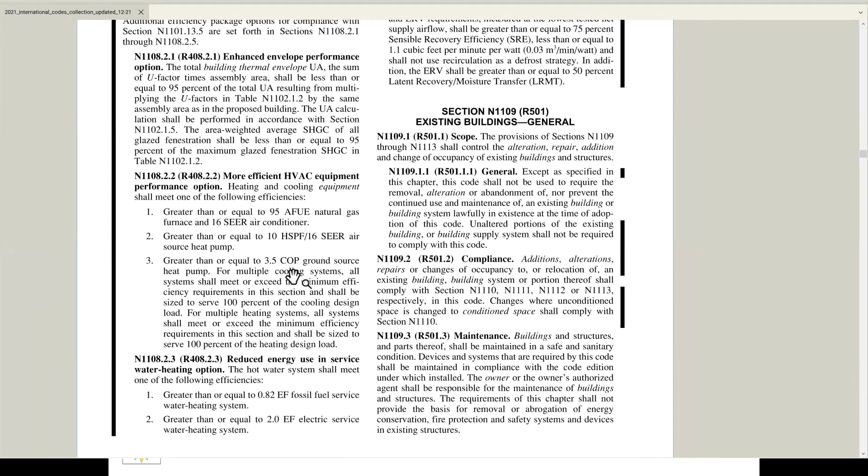And once again, it does say options, but you have to choose one of those options. You have to use one, you got to pick one of these. And I'm just trying to point out that some of you might be doing this already, right? More efficient HVAC, because that's what you're doing anyway. You might be putting in a more efficient water heating option because you're doing it anyway. You could be doing one of these easily, okay? Very possible.

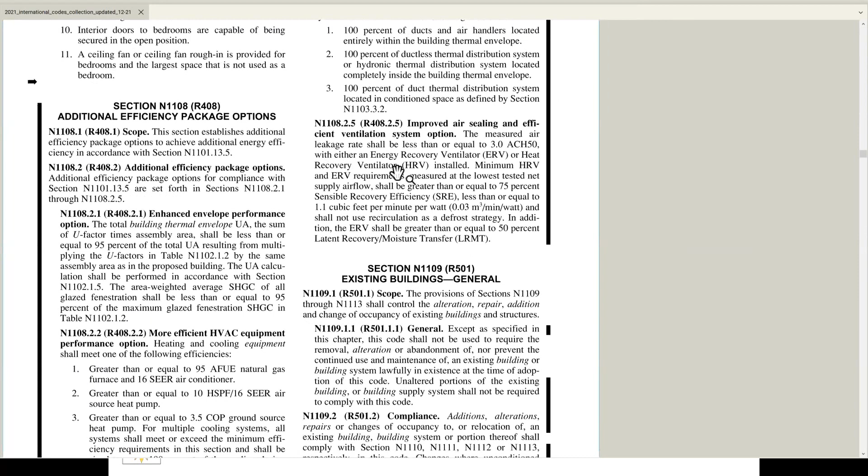Here, some of you are actually using HRVs and ERVs already, okay? So here it just says, hey, you're going to be less than 3 ACH50, and I have no idea what your ACH50 numbers have been, but I have a feeling they're less than 3 ACH50, because 3 ACH50 is the max you can be, so I suspect you are less. Here it's just saying, put in an HRV or ERV that's at least 75% sensible, which most of them are. I don't think it would be difficult to see that.

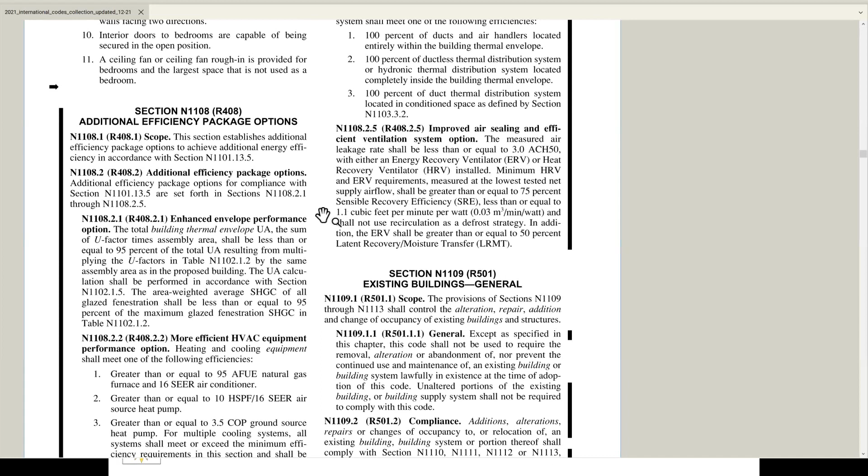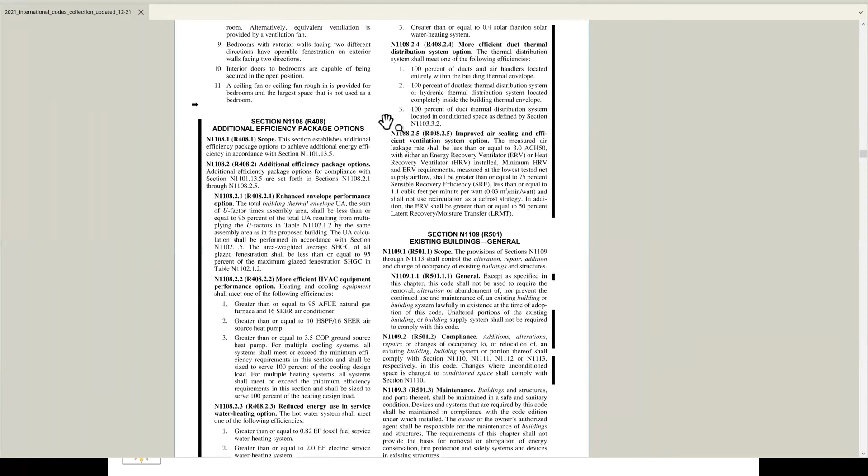So I'm saying, at least in Cherry Hills, a lot of the things that I see are just standard for you guys, you already do anyway, right? So I'm thinking that some of these will fit. I don't know that you're going to have to go to any extent to meet that. Production builders, on the other hand, are going to have a time getting used to this. Custom guys like yourselves, integrating one of these things, I don't think will be particularly difficult.

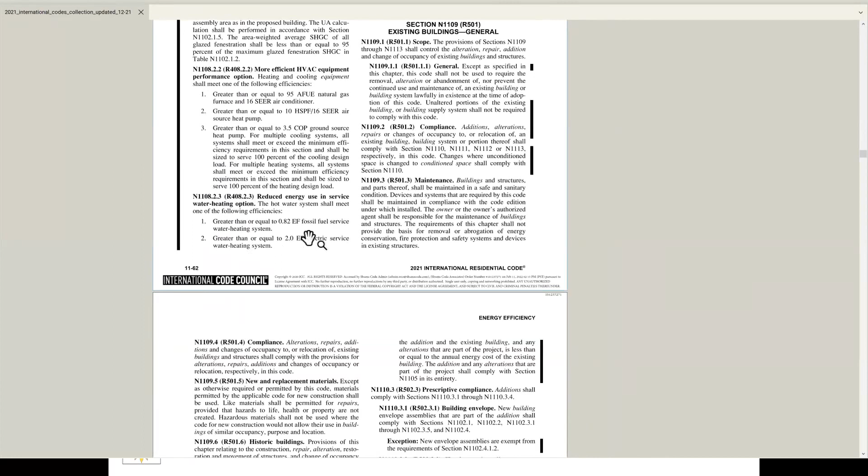What else? Do they need to state that on the plans, or is that on the manual J? Well, it'll be stated on the plans. You'll have to state what it is we're doing. And if it happens to be something more efficient, like a more efficient HVAC, then I'll just verify that, hey, it's got to be 95% on the 16 SEER air conditioner. Or if I'm using a fairly efficient water heater, we'll need to verify what it is you're installing.

Yeah, it's all in the description, guys. I have one project I've gone at least 3 rounds with, and they finally told me - since I said if it's going to be a sleeping bedroom, you have to sprinkle it - that they're not using it for a bedroom. Let us know what's going on the plans, especially with at least one architect out there - give us a good description of what you're doing and what you're replacing, and I cut through that. Sometimes the description on the permit application just says interior remodel, and it's where's Waldo. Finding Waldo takes time.

Yeah, so I gave Ethan some handouts we created for Excel dealing with the 21 code, both commercial and residential, talking about the different submittal requirements. He's got that, and I gave him a PDF so you guys can print them or he can send them out to you. If you've got any questions, don't hesitate.

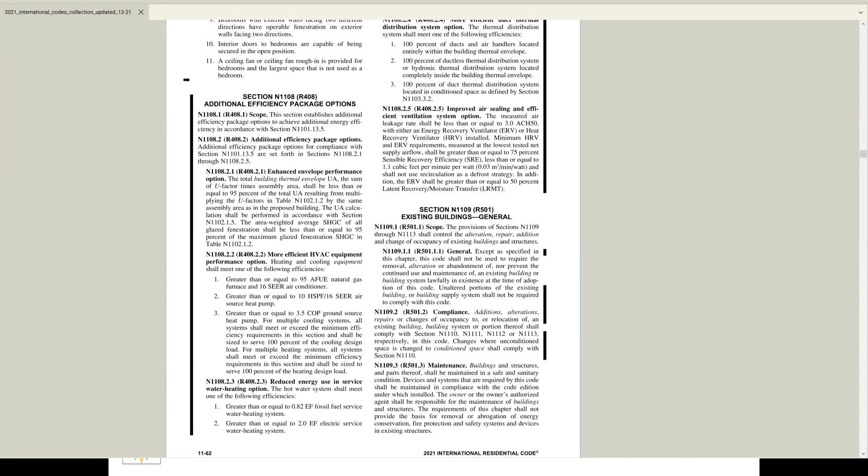Don't hesitate to give me a buzz. Send me an email, or better yet, ask Chuck. Yeah, I'm pretty dangerous when it comes to electrical and HVAC.

What else, guys? Any other questions?